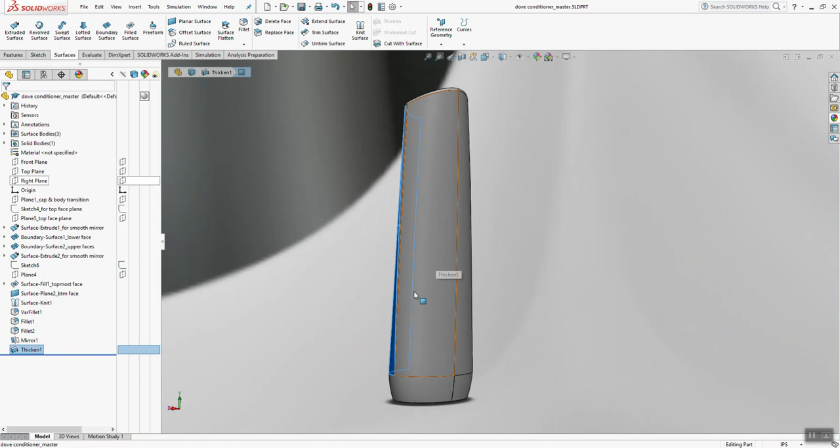That's something that oftentimes would be more conducive to using SolidWorks surface modeling. And that's why we opened up this Surface tab up here. You have to right click if you want to get it open. Right click on those tabs and hit Surfaces. By default, it's usually not on. So like I said, right click on these tabs and open up the Surface tab.

Because that's what we're going to be doing a fair amount of today is surfacing. Obviously, this is one of the reasons why you're in this class, SOLIDWORKS 3. So as you can see also, and this should be very obvious, this is a symmetrical design, which means the left and the right side are equal. And that also makes it a good candidate for modeling one half of the model and then mirroring it over. What that does, obviously, is eliminate a lot of work. Technically, you're doing a fraction of the work that you'd be doing if you're trying to model both sides at once. I hope that makes sense to you.

Now, without further ado, I want to refer over here to the Feature Manager tree. As you know, SOLIDWORKS is capable of showing the history in which the model was built. So even though I already have built the model, I can roll this rollback bar all the way to the top and show you step by step the procedures I used to create this model.

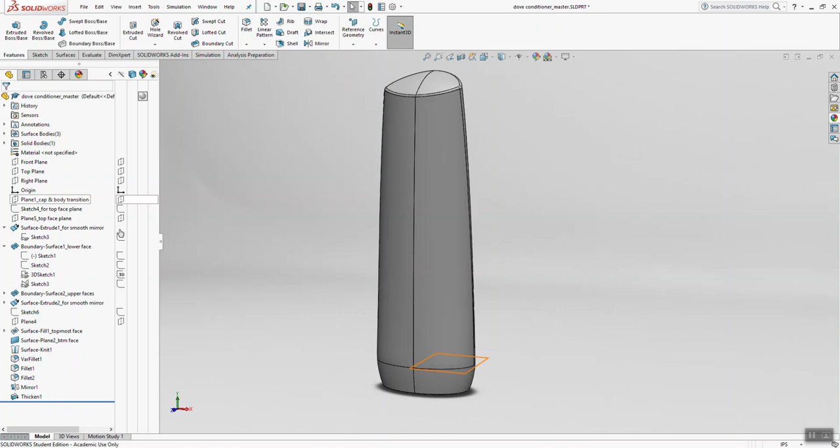But there's a way around that, and maybe you're already aware of it, I'll show you that soon enough. Another thing I should mention is this little arrow up here. I tend to keep it open, for obvious reasons - I can quickly turn on and off these elements, either sketches, planes, etc. Features I can very quickly hide or show.

Another thing you got to be aware of are the surface body folders and solid body folders. I'll be referring back to them quite often, as you'll see.

I need to get a drink of water. I'll be back with you probably in one second your time, about ten seconds my time. That was good water. Yep, I just had a sip.

So, yeah, I'm in danger of blabbing now because frankly I'm very tired, people. So I hope you feel bad for me because I'm doing this late at night after work when you guys are probably playing video games. It's a shame. It's a real shame.

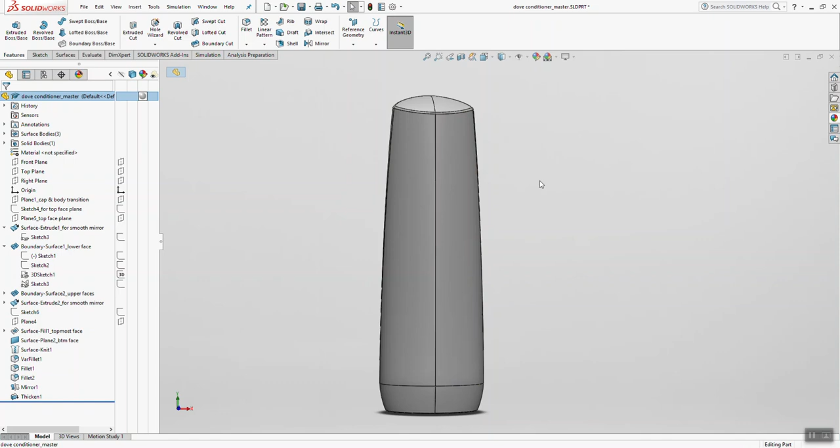Anyway, what I'd like to do is start to tell you how I constructed this. As you know, I pretty much built this whole bottle as one form inside of one part. This part I named Dove Conditioner Master. I put Master there because later on I'm going to be splitting apart the cap area and this body area into their own separate parts. But because these forms pretty much merge together, the cap and the body, and it looks like one continuous form, might as well make it in one file and then split it apart later.

So at risk of sounding redundant, I just told you that.

So let's roll back here, and you'll notice there's a few different ways to roll back. I can actually grab this rollback bar and scroll it up, or I can just right click a particular sketch or feature and then hit the rollback button there. So this pretty much tells me where I started, but if I scroll down to sketch 4, technically sketch 4 is not where I started.

Just to let you know how the rollback bar works, you'll notice when I rolled back up here, most everything down in this region remained grayed out, but a few of these sketches are more dark, like black, and they're not faded out at all. This is a little odd for people that don't really know what's going on, and of course you don't have to do this because you're looking at a blank model.

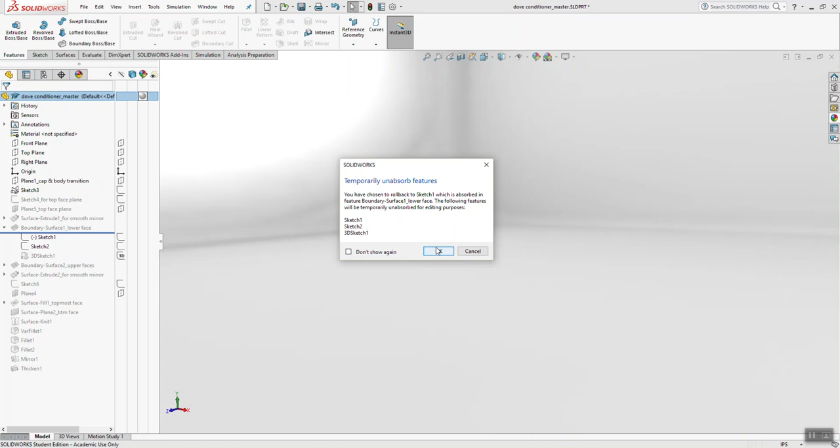But anyway, if I roll this rollback bar down right above sketch 3, it will temporarily unabsorb the sketch 3 feature and pop it back into where it was originally created. And then same thing with sketch 1, sketch 2. If I roll these guys down, it will temporarily unabsorb those features. Oops, hit OK. And now if I roll back down, it looks like all these are now ready to access.

A couple things you got to be aware of if you're working with a rollback bar later on in your career: if you roll back down underneath one of these features that these sketches created, those sketches will pop back underneath those features. Watch this - see, they pop back in now. So now I gotta kind of redo all of that, pop those back out. The reason I'm doing this is, I would imagine you can guess: it's by popping and unabsorbing these features out from the child features that they created.

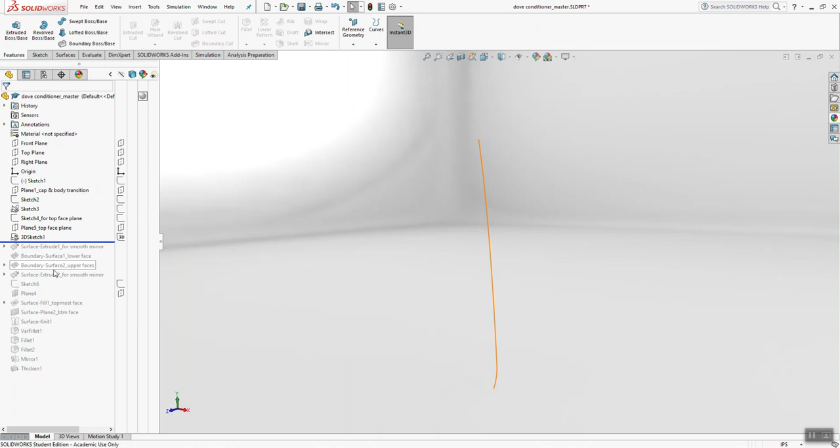I'm now able to see these sketches and planes in more or less their original order of creation. The first thing I did was create sketch 1, which represents the very bottom of the bottle, the base on which it rests.

Then you'll notice I created a plane above that, and a second sketch representing the part of the bottle which flares out. It's smaller at the base, but it comes up and flares out into a bigger elliptical shape in that area. I'll cover these in more detail shortly.

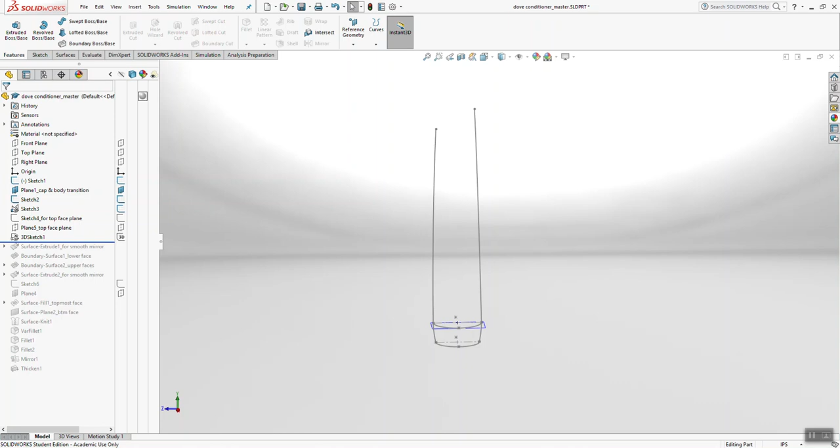I then made, on the right plane, a profile sketch of the shape of the right side of the bottle. Unfortunately you can't see that shape very well in this image, so you'll just have to trust me and create a similar shape. These splines represent the shape of the bottle if you were to slice it in half down the center plane. We'll get to that more later.

Then there's this line I created up here, which was essentially only to create a plane, and that plane was used to create...

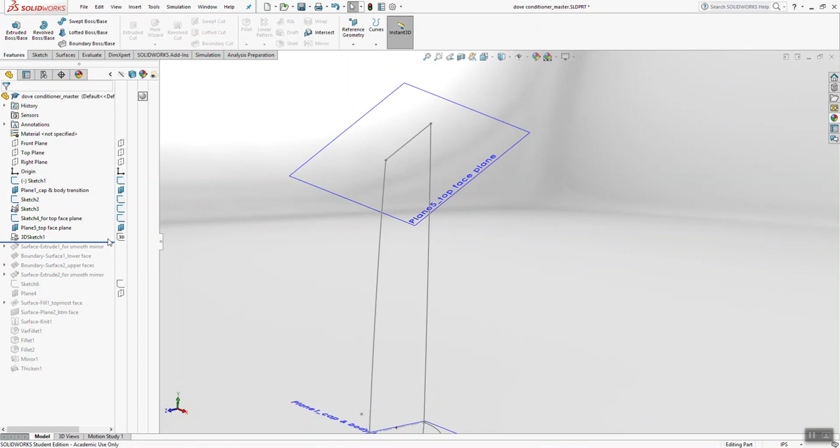Looks like I'm missing one sketch. Hold on. Why is that not showing? Sketch 4, sketch 10 — yes, a couple of those were not unabsorbed like they should have been. I don't know why SOLIDWORKS didn't unabsorb all of them, so bear with me. Ah, okay, now sketch 10 is unabsorbed.

That's good. So I did sketch 10 on that plane, and that represents this little contour up here, which, believe it or not, is a 2D sketch — we'll get into that later.

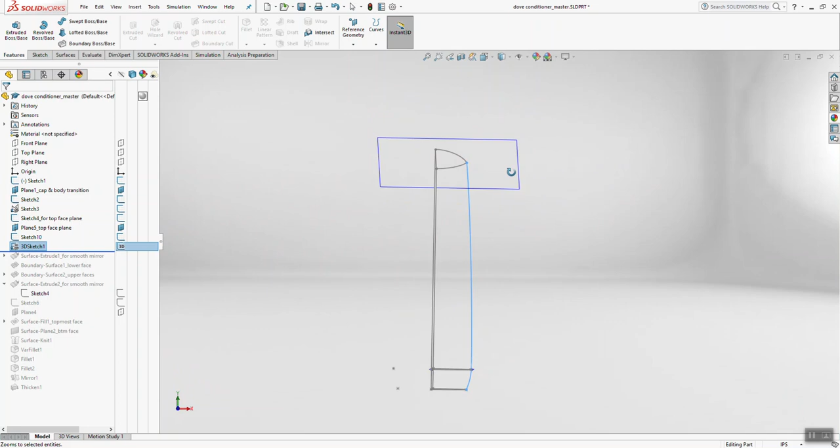And then there's this little 3D sketch here, which represents this part of the bottle that you would almost think is vertical, but in fact it moves forward. This edge moves forward as it moves up vertically, and also, viewed from the front, it moves to the left as it moves up. So it's a 3D sketch because it's got compound curved transitions.

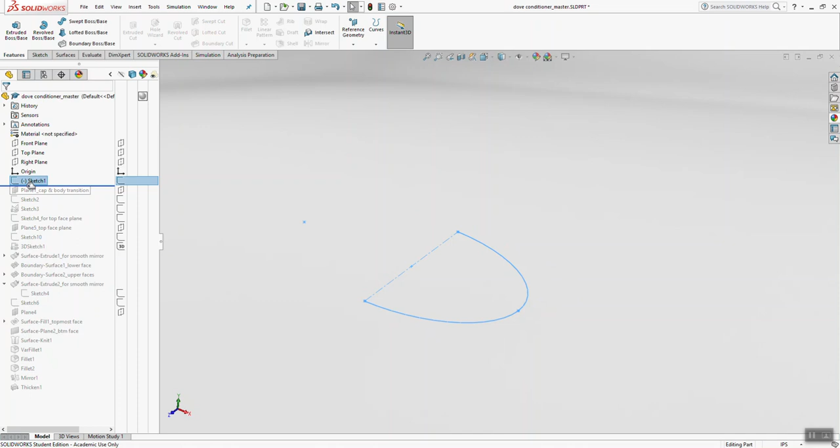So just to let you know, you should start with sketch 1. If you take a look at the sketch plane, I used the top plane — I showed that from Edit Sketch Plane, in case you didn't know. That technically allows you to switch the sketch plane of a given sketch if you used the wrong one. When you switch sketch planes, chances are things will go crazy on you if you've got a lot of features after that. But anyway, I digress — sketch 1 is right there.

So if we open up sketch 1, this is what I have. I basically sketched an ellipse which I trimmed off — you're only seeing half of the ellipse left over. I sketched the ellipse up here and gave it a dimension of 2.5 inches wide in the x-axis by 1.625 in the z-axis. Just for a little refresher on ellipses, this is more or less what I did.

And then I put a little center line in there. The reason I split the ellipse in half is because, frankly, I didn't need to model the whole thing — I was just doing one half of the model that I mirror later. I used Trim to Closest from Trim Entities to cut that off. You're able to dimension the entirety of the ellipse, even though it's half gone, because it remembers it was an ellipse even after you trimmed it.

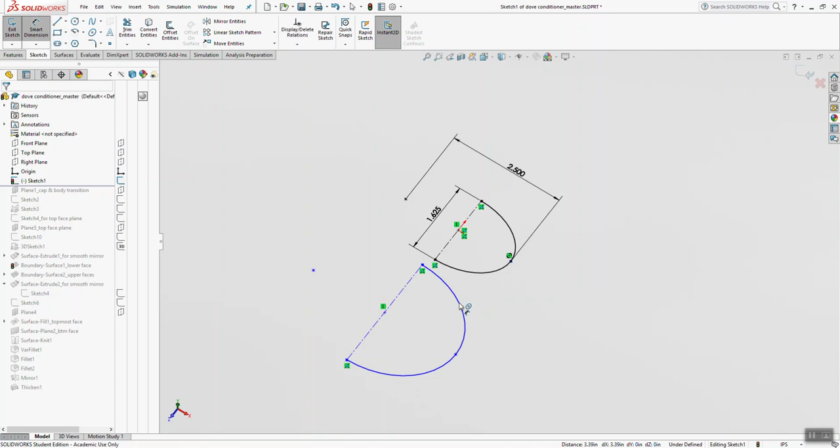As always in these tutorials, for future reference, I'd recommend you look carefully at the relations I put in. I centered this reference line, or construction line, or center line, on the origin with a midpoint relation. It's vertical, and it's coincident — the center of that line is coincident with the origin, so it's symmetric in front of and behind the origin. That little red set of arrows represents the origin of the plane, related to the origin of the model, the 0,0,0 XYZ. So that was drawn on the top plane.

Good stuff. I next, like I said, added in a new plane. I went to Reference Geometry, Plane. If we edit the feature, you'll see I just clicked on the top plane and offset it at 0.75 inches.

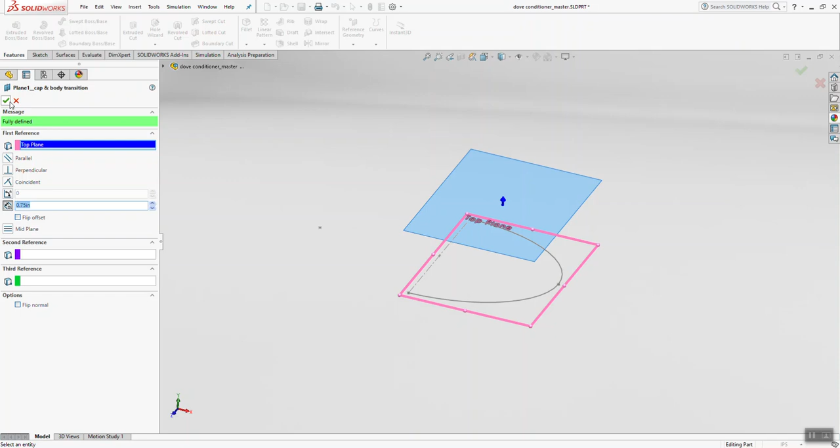This looked to be about 0.75 inches from here to here. I'm setting the plane at that height because that's where the curvature changes between the cap and the body—it goes from moving out to moving back in. That's also a natural place to put the plane due to there being a split that's going to happen later between the cap and the body.

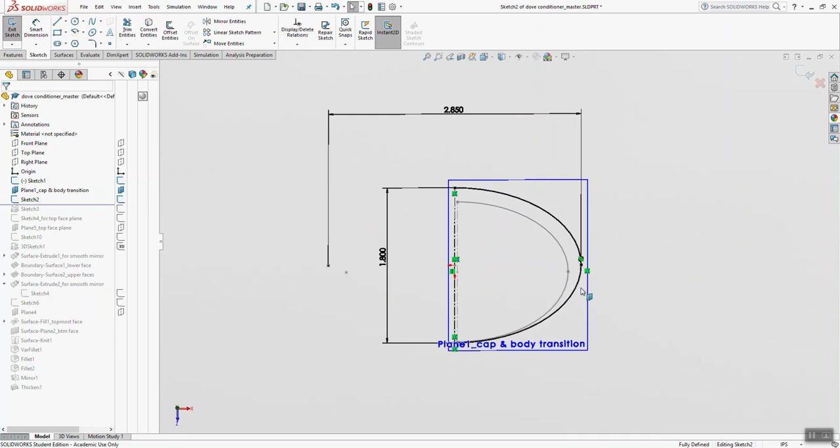That's a plane that ultimately will receive a sketch, which is sketch 2. Sketch 2 is pretty much the same thing as what I did on the original sketch. This gray one back here is sketch 1, but this black one is technically what we're drawing now, and it represents this area here.

Forget about that little curve, that will come later when we do the rest of the master model. Basically, we're drawing the larger ellipse in that area because it moves up and kind of moves out as it moves up. So this ellipse here has to be a bit larger—it's 2.85 inches wide by 1.8 inches in the Z direction.

Same kind of relations going on. I'm going to turn off plane 1—oops, I turned off sketch 1. I'm going to turn off plane 1 because we don't need to see it at this point.

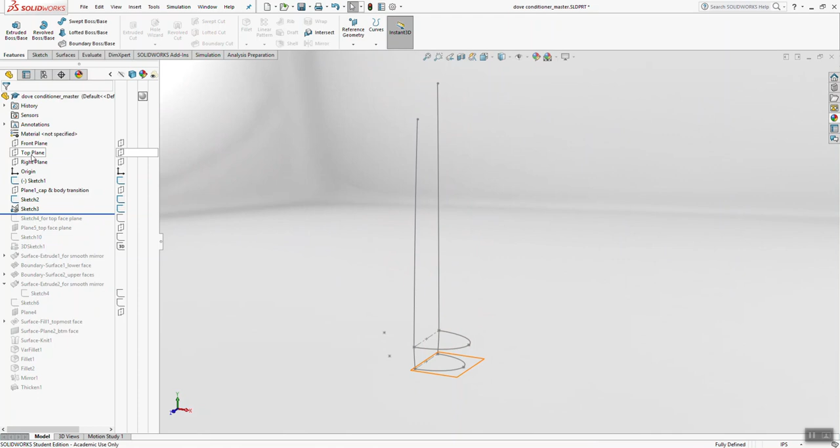The next sketch I did was sketch 3. Sketch 3, like I said before, represents the shape of the front and the back of the bottle at the mid plane. Sketch 3 was actually drawn on the right plane, and that right plane represents basically the very middle of the bottle. If you were to slice through the bottle vertically, right at the mid plane of the bottle, that would be our right plane. And of course, that's a plane we're going to be mirroring across later.

These curves that I'm creating here represent basically the edge that you would get—oops, hold on a second, why did I move to perspective view? Okay, it represents the edges that you would get if you were to slice right down the middle of that bottle, and then looking at it from the right side of the bottle, that's about the curves that you would see.

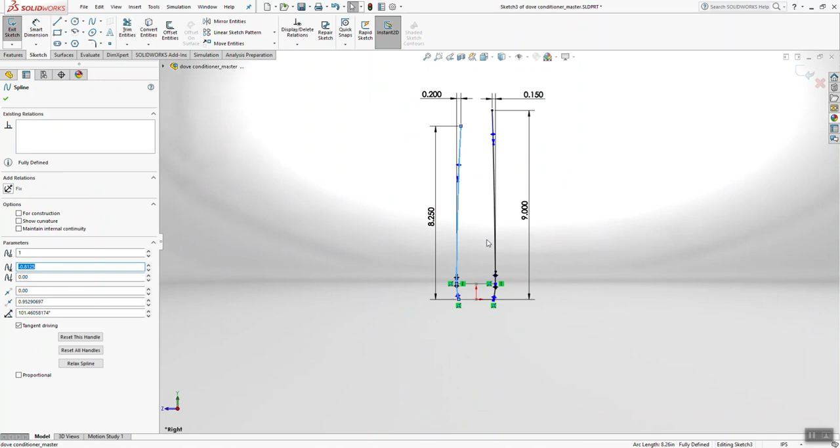So take a good look at what I did here. I used a spline for the front, and that's a 3-point spline. I used also a 3-point spline for the back. And just so you know, that spline—the end point does have to be coincident with the point of this ellipse. Make sure that is actually point to point.

The second point of the spline should be exactly coincident to the point of this ellipse. And the end point of this should be 8 1/4 tall off the bottom and about 0.2 inches in from that outermost point, which is that point there. So 0.2 inches in. Then same thing back here—make sure the point is on the point. Those two are connected, those two are connected.

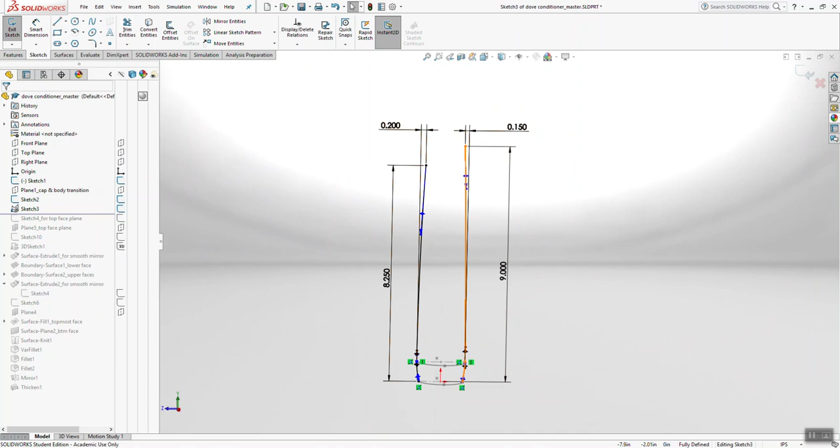And frankly, these dimensions are something you should follow as well—9 inches tall there, 0.15 in. That is setting us up to have this nice little inclined face up here in order to get that kind of inclined face up here that you get in the photo.

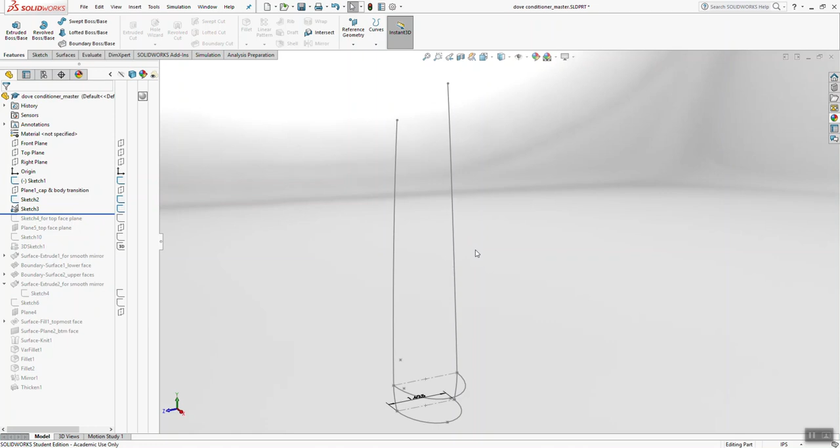This is a good time for me to let you know that there are many different approaches you guys could take to sketching. You technically could sketch these lines first if you wanted, and then sketch these ellipses after and connect the ellipses to the lines. There's many different order of operations that can be taken with SolidWorks or any other CAD for that matter, and still get the job done. So the order in which I'm creating this might not be the order in which everybody else would, or someone else in particular might—just keep that in mind.

But I do feel this is a very stable way to build it, and so I recommend that all of you follow this method. Don't try to build these ellipses first and then build these profile sketches, or the profile sketches first and then the ellipses. Try to follow the same order, just so that your model will behave similarly to mine.

All right, so that is now bringing us to this. And what is this for? Well, this line technically is not going to be creating any geometry. It's more just a reference line, which is why I named it 'top face plane'.

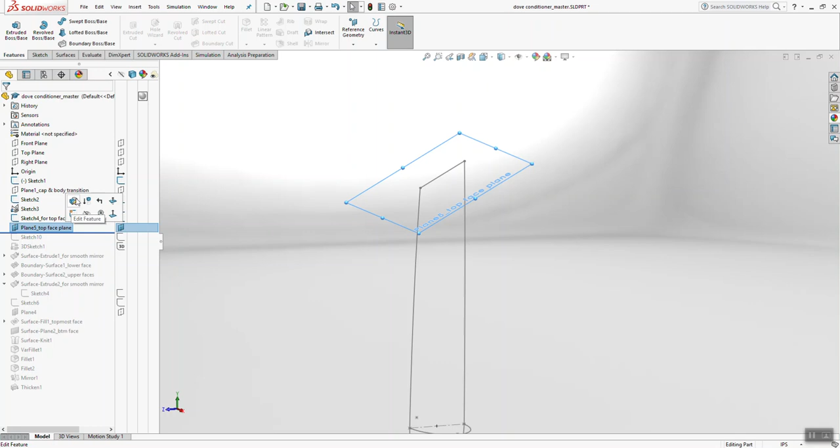It's a reference line because it is going to generate a plane that is slanted, and that's this plane here. So we're making a new plane that's at a diagonal or at an incline. If we edit that feature, you'll see how we created it.

I clicked on the right plane for one reference to create the new plane, and then I clicked on that new line to create that new plane. And what it did by default when selecting those two, it of course made it coincident to the line, which this new plane in blue is.

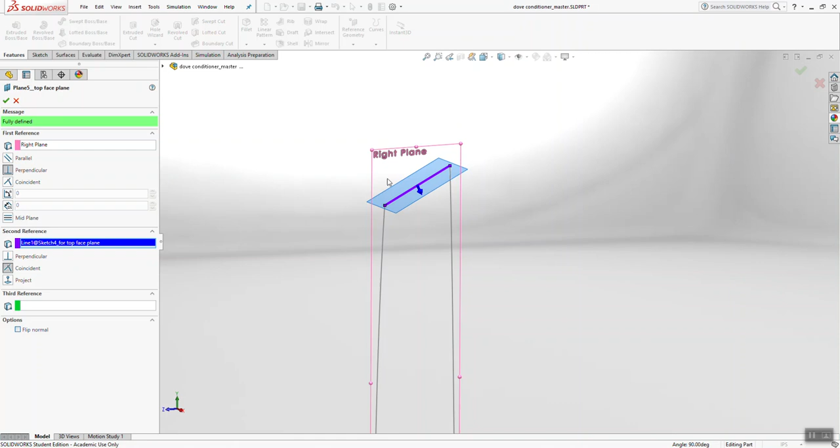It's coincident to that line I sketched, and it is perpendicular to the right plane. Yes, you could try these different options, but really when you have these two selected, what this create plane option or feature is most likely going to do is try to create a perpendicular plane to the right plane on that line. So keep that in mind.

This is one way to create a plane pretty simply. And the reason why I'm creating that plane is ultimately to create the shape that I need for the top of the bottle up here. And that would be this little arc and that back arc. That arc I'm going to draw on plane 5, and that is sketch 10.

Just so you know, I'm going to turn off sketch 4, this one, because frankly it's not doing anything for us anymore. I'm just going to hide it, not turn it off. Hide it so it's out of view. And now we'll see sketch 10.

Now sketch 10 represents, like I said, the edges, the top edges of the bottle. And this is how I dimension them. If I open up the sketch or edit it, you'll see it is 2 different splines. One spline here, a second spline here, and the endpoints of each spline are coincident here.

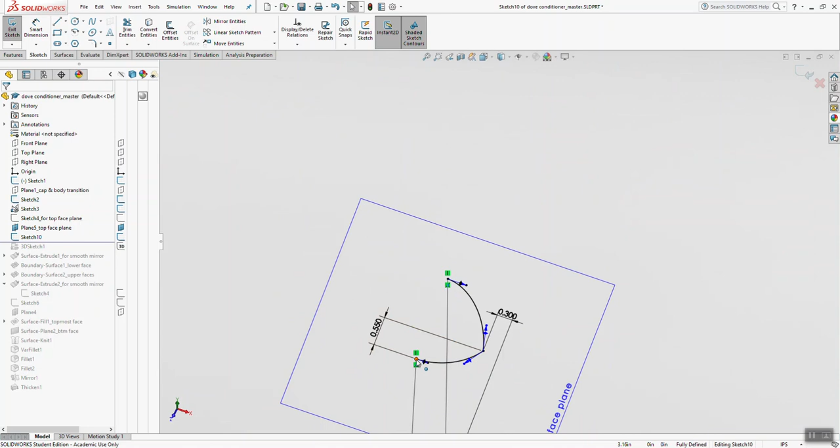I made that endpoint 0.55 from this point as measured in this direction. And then I made it 0.3 from, I believe it was this point over here, but let's go normal to take a look at the normal of that plane. Yeah, I selected that point down there. So if you take a look at that 0.3, it is actually 0.3 in from that point down there.

So that represents the top edge of the bottle. Once again, bear in mind these relations. The endpoint of the spline must be on the endpoint of this edge, coincident. The endpoint of this spline must be on the endpoint of this edge, coincident.

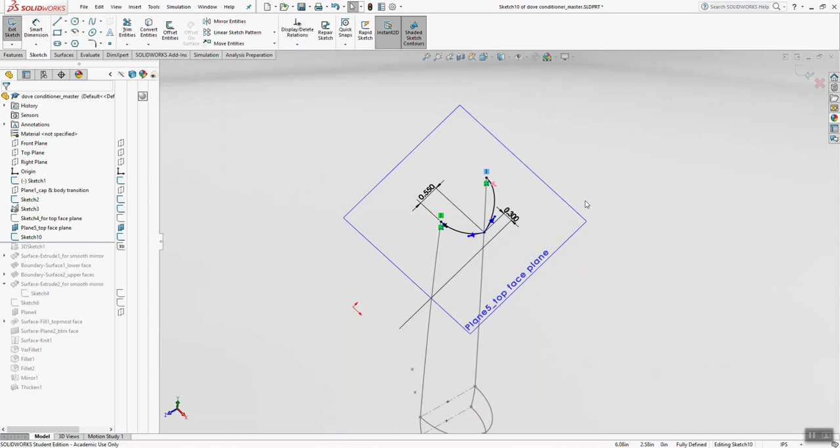And the handle, in this case, because my plane when it was created kind of by default was rotated 90 degrees compared to what I would have expected, I used vertical. You might need to use horizontal depending on how this plane is oriented when you created it. But anyway, the basic idea is this handle is forced to go this direction.

Because if you don't do that, and if we were to delete that relation and delete this relation, you could end up accidentally creating this kind of scenario where your handles are not creating a nice perpendicular entrance to the midplane there. So when you mirror it, you're going to end up with a butt, or you would end up with like a little sharp there. Maybe that's something I'll show a little later, the result in 3 dimensions.

Discard changes and exit. I'm not going to save what I just did there. So that's what you should have by now.

And then we're going to do a 3D sketch. And that 3D sketch, let me hide this plane in the meantime.

Hold on, I've got a mosquito problem. I'll be back. Okay, I don't know where that mosquito went, but anyway.

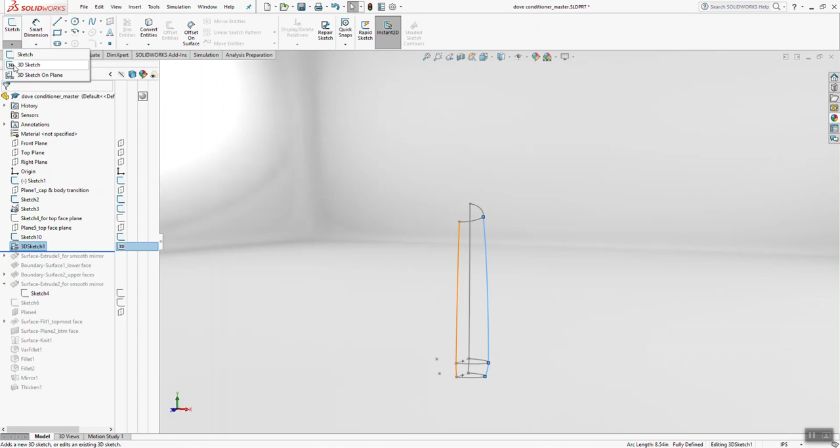Here is a spline that is not a 2D sketch, it is a 3D sketch, and 3D sketches are found with a drop-down arrow underneath the regular sketch button, and 3D sketch is found here. What 3D sketch allows you to do is create a sketch which is not bound to a 2-dimensional plane. This sketch can move any direction in every direction.

In this case, what we've got is a 3-point spline, yet again, and that's because we're connecting 3 sections or 3 profiles. We have this one, of course, and we have this one. So we got 1, 2, and 3 points.

And the thing is, each one of these sketches here has a point that you can snap the spline to. So one obviously point of the spline ends up on the endpoints of these, and another one's yet again coincident. I don't know why the relations are not showing, that's why view sketch relations was turned off. But that's coincident, and this one is coincident.

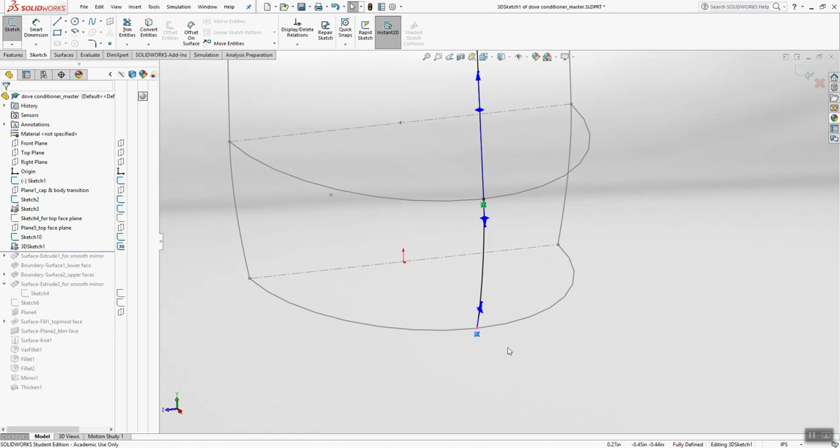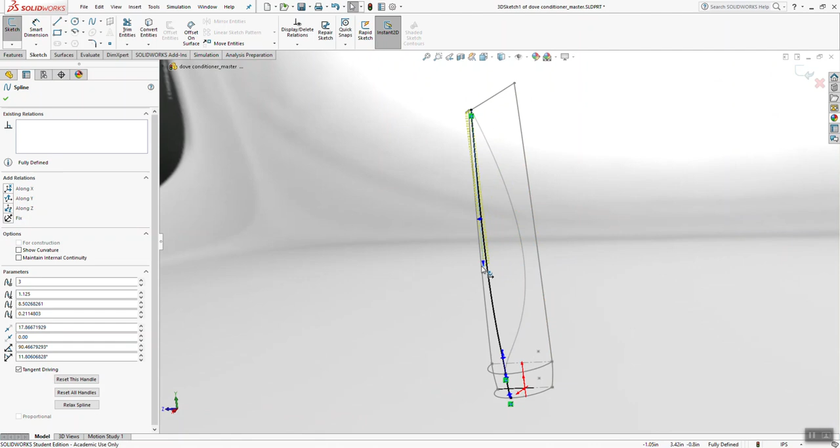That one is also coincident up there. The other thing you've got to keep in mind is that these splines can go wacky very fast. If you try to move the spline in an isometric view like I am right now, you see that yellow box kind of morphing as I move this handle. That's showing the spline handle moving in X, Y, and Z direction.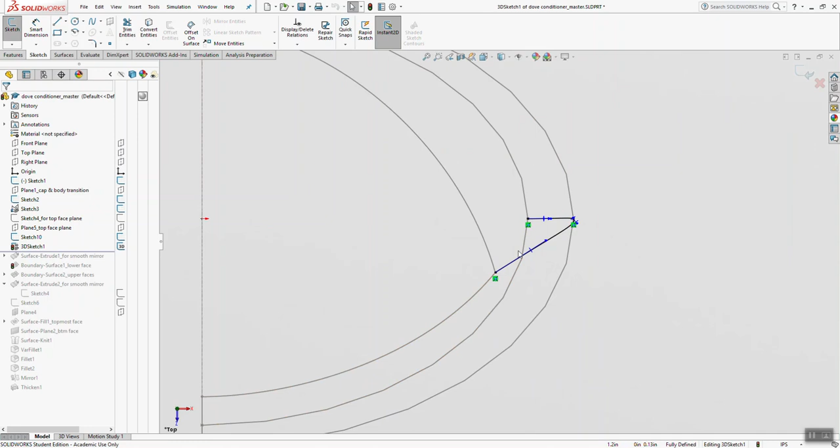But honestly, the same thing can be done in a single view - if you're working in top view, the handles only move X-Z; in the front view, only X-Y, etc. So what I try to do is get the spline looking good in one view, say the front view, then move to the right view and get it looking good, then maybe move back to the front view and tweak it again.

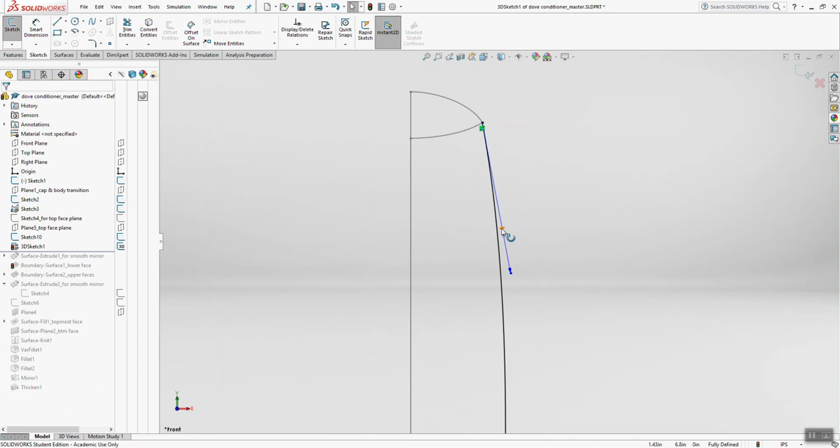With splines, different parts have different functionality. If you hit the very endpoint of the spline, you can move the strength of the spline handle, changing the curvature or acceleration in that area, and also the angle - both at once. If you hit the arrowhead, you're only able to change the acceleration or strength. If you hit the little perpendicular arrows, it only allows you to change the angle at that point. That's how to work with splines in a fairly controlled manner.

Another thing with splines: by default, SOLIDWORKS often has 'maintain internal continuity' checked. Sometimes it's good to have on, other times it gets in the way - it can make splines less editable than you want. So I tend more often than not to turn off or uncheck maintain internal continuity. Play around with that and see what you get.

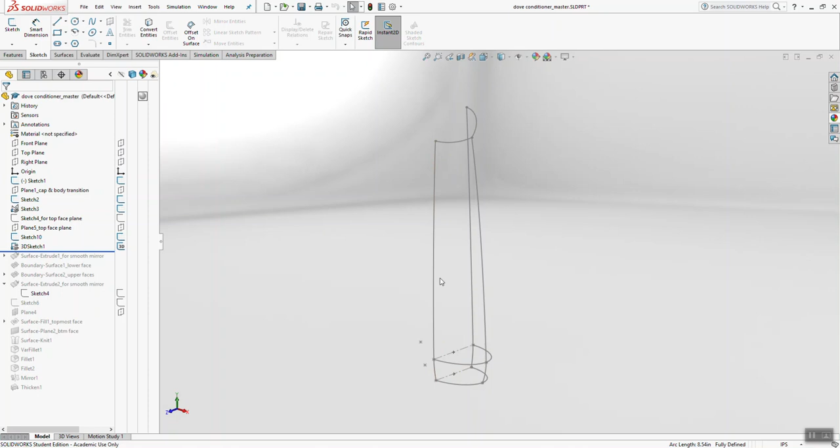So that's basically what we're doing here. It's pretty obvious at this point that we're creating a little wireframe, like a little armature for our bottle. This bottle lends itself to this technique because it's made up of fairly simple faces - all of these are like 4 sides. Basically you've got 1 side, 2 sides, 3 sides, 4 sides, and the same on the back side. When you have well-defined edges like this and you're not having crazy transitions between faces...

It's actually probably a better approach to take this approach where you're modeling by creating all your sketches first, creating a little wireframe like I did here, and then filling in that wireframe with surfaces later.

Yeah, I just got interrupted. I know you didn't realize that, but where was I? I was talking about wireframes.

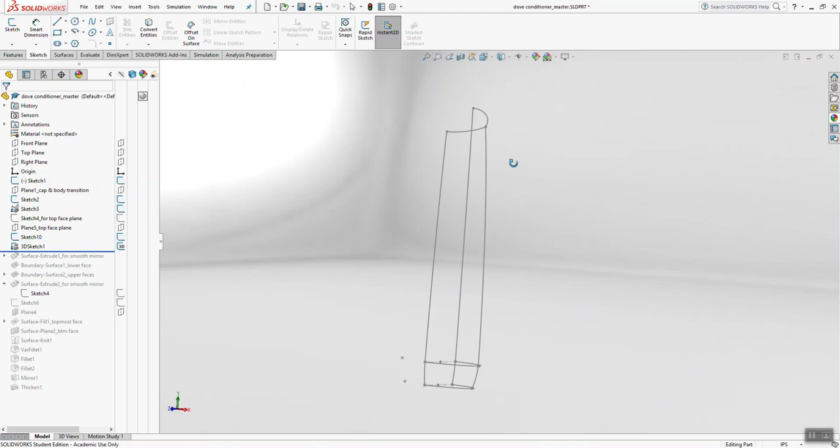Modeling something like this is actually a good idea to use this technique. In later classes, we'll cover different approaches to certain models where you overbuild the geometry and trim it away. But this model lends itself to directly creating the geometry through sketches right at their edges, and that's what we're doing.

The next step would be, and I forgot to show this one. I'm going to unabsorb this sketch. The next step was sketch 4, which is a bit of a straggler, as you can see. What we had before had nothing defining the shape in the midsection on this top face, so we need to do that, and that's what sketch 4 is doing.

Sketch 4 is sketched on, yet again, the right side plane. If you look at the sketch, it's a 2-point spline. You don't really need a 3-point spline, just 1 and 2, then adjust your handles to get the curvature you want for the face.

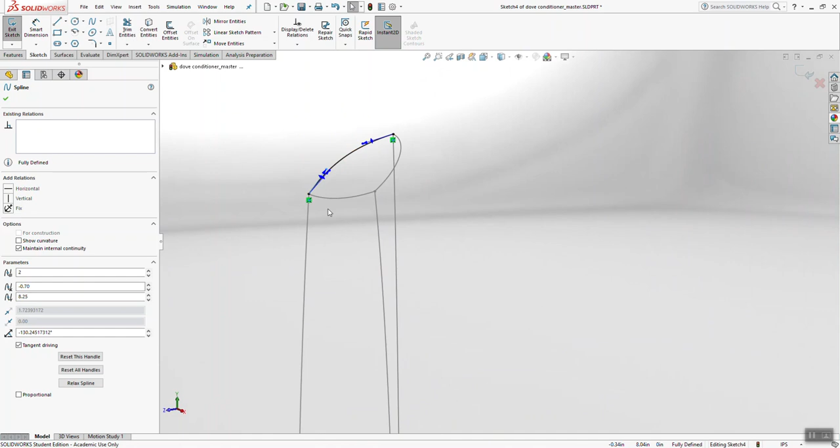Because of that, if I show the sketch, it is exactly how I drew it. It kind of blows out in the middle there.

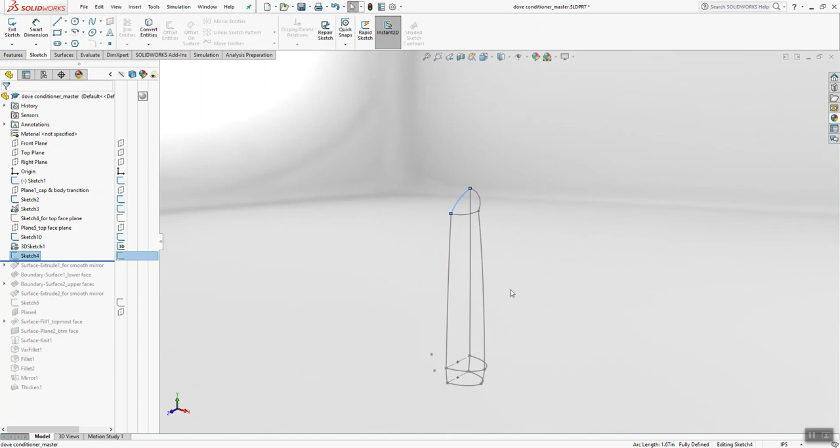Ultimately this will fade into this area, which you'll see soon enough. Let me save. Well, you should save — I don't need to because I've already saved this previously.

Surface extrude is one thing. This might confuse you, but I'll show you anyway. Surface extrude 1 — I basically took those 2 splines in the middle and did an extruded surface with them. Why did I do that? Well, it's kind of an older method, but you'll see exactly why shortly.

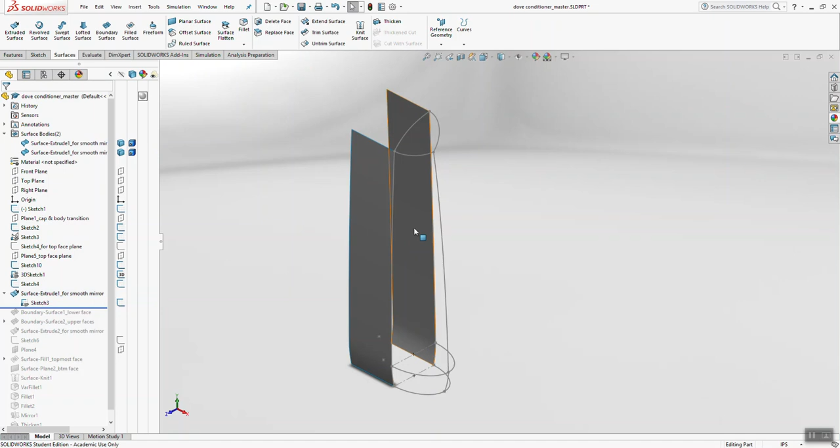Sketch 3, in my case the splines that are in a vertical orientation, those get extruded out straight, because when we create these surfaces on this half of the bottle, we want them, when they meet the middle of the bottle at the right plane, to be very smoothly related to the left side of the bottle that will come later when we mirror it.

When you create these reference surfaces, they're basically there so that when you create the new surface on the right side of the bottle, it will smoothly transition across the midplane, because these surfaces will be used as a reference for curvature as it meets the middle. That honestly won't become clear until a little bit later, so I'll leave them here, but turn them into transparent surfaces for reference. Hopefully those won't be too confusing in the background.

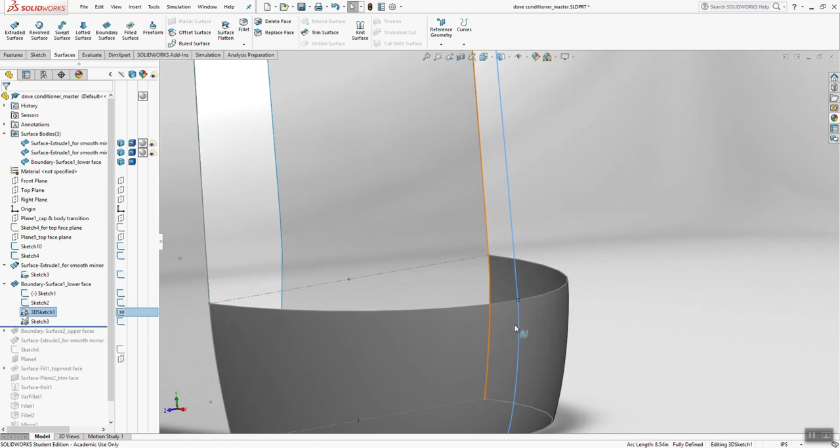The next step would be a boundary surface of this lower face. You might wonder why I didn't go all the way up — it's because of this edge right here. If I went all the way to the top, you'd have this spline edge running all the way through the model. I wanted this bottom face to be very clean without any interruptions if I hid these sketches. This might make sense in a moment.

Let me continue to show you a couple things. If I look at boundary surface 1, this is what's going on. For direction 1, let me expand that again — for direction 1 I use sketch 1, which is that bottom profile, and then I use sketch 2 to build it up.

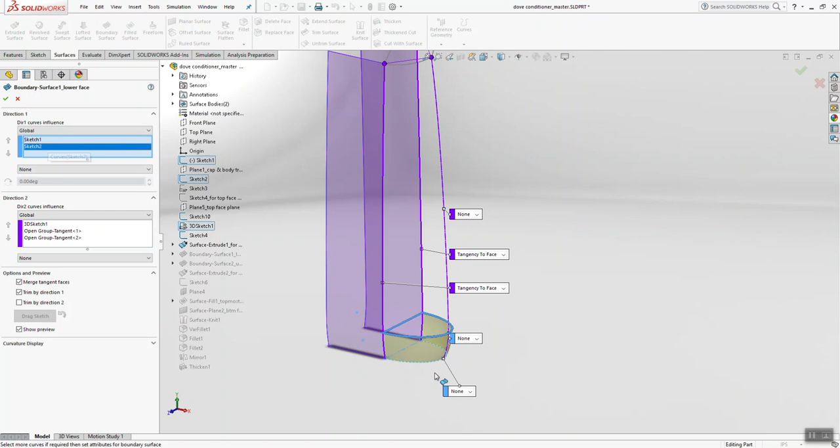The geometry will interpolate between this direction 1 sketch and the second direction 1 sketch. But by default it won't look like it currently does unless you have your direction 2 curves established and defined. These direction 2 curves are basically telling SOLIDWORKS how to interpolate between this bottom profile sketch and this top profile sketch.

Without these sketches, if I was to just clear them, this is what the surface would look like. It's close, but it's certainly not what we want. That straight transition is not what we want.

So for direction 2, we say we want that sketch, we want this sketch, and we want this edge as well. Notice I turned off the sketches that were here in the midplane, and I'm selecting the actual edges instead. For here and for here, I'm selecting the edges of the surface. Whenever you have an edge that is directly in line with a sketch, it's typically preferable to select the edge instead of the sketch in SOLIDWORKS.

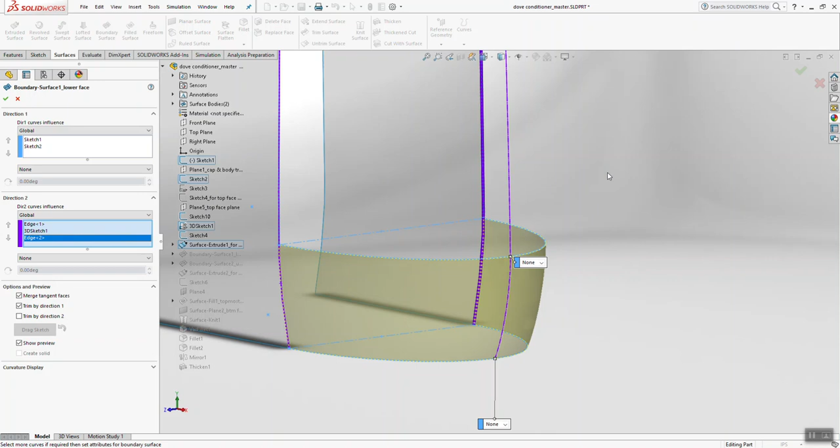I'll tell you why that is right now. As you may remember from previous classes, it's pretty important when creating a surface to consider how that surface meets up with adjacent surfaces. In this case, we have reference surfaces created front and back, which help us define this surface and its curvature in this middle portion. So what you ought to have is edge 1 selected, this front edge here, and you click this little drop down arrow and say tangency or curvature to face.

Tangency means the new surface we're creating, at this edge that is highlighted, edge 1, will be tangent to that edge, or tangent to the surface related to that edge, which means it will come in nice and smooth. Edge 2 is the same thing - you can say tangency to face, because you want this new surface, as it wraps around and meets the middle, to have nice tangent curvature with this surface.

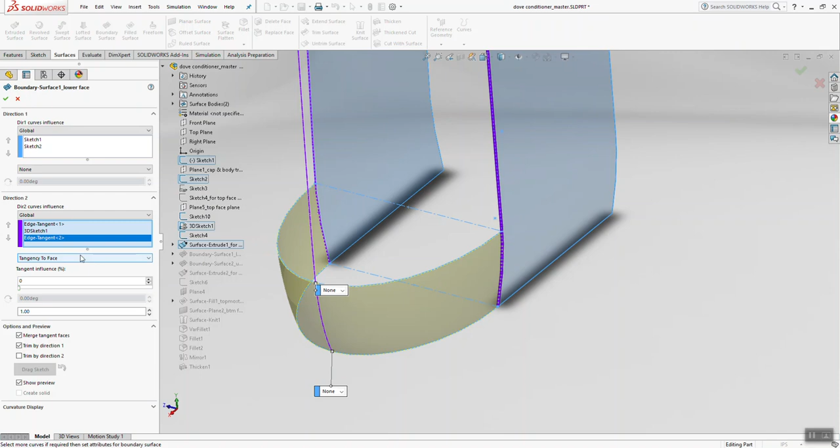The other thing you might recognize is if you don't have trim by direction 1 on, the surface will want to be created all the way along the length of the direction 2 curves. That's because with boundary surface, it just keeps following whatever sketches you're using until it reaches the end of those sketches. But as I said before, we don't really want to go up that high, and I'll show you why right now.

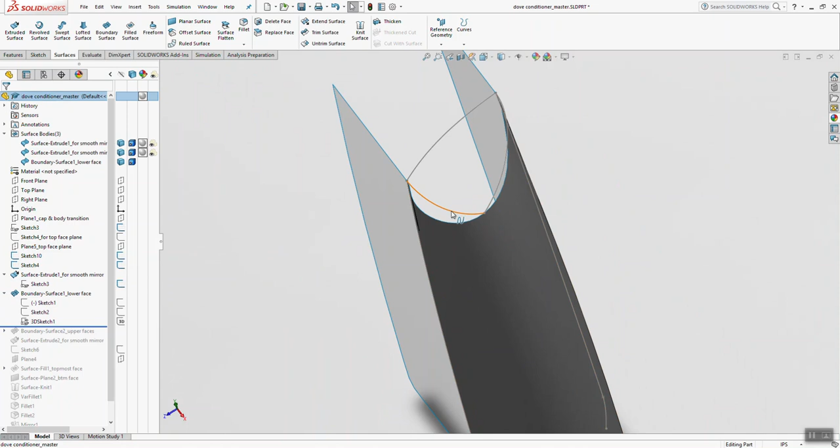Because if I don't have trim by direction 1 on, we end up getting... oops, that's not the best example, but we end up getting this surface, and we're losing out on that bit, the edge there. So if we were to do it all in one shot, where we included sketch 3 in here, it would cause problems. I'll maybe talk to you guys a little bit separately in class about that.

So what I do is make sure trim by direction 1 is turned on. What that does is trim the surface wherever the direction 1 sketches end. So you only have these 2 sketches, it trims off the surface at the ends of those sketches and doesn't allow it to continue running along the direction 2 curves. So make sure that is the case.

By doing all the... oops, I did not save. Hold on one moment, please. Trim by direction 1, and let me hit the check mark. All right, so that's what you should have right there.

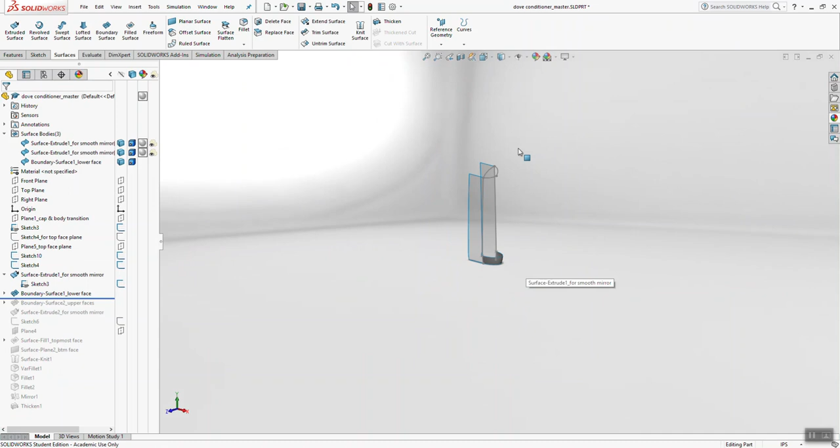Now for the next step, I would say you have to do boundary surface 2. That is the top portion of the bottle, the upper faces. And this time you are involving the edges here that you created on the surface. Like I said before, try not to select the sketch that is here - hide the sketch, and instead select the edges.

This says open group. The reason why it says open group is because there's one edge and another edge that make up this complete curve, and you have to select them together using the selection manager, which is found here, selection manager. If you're going to select both this front edge and this back edge in one shot, use the selection manager. If you're unfamiliar with selection manager, let me know and I will explain it. Hopefully that's something you guys already know.

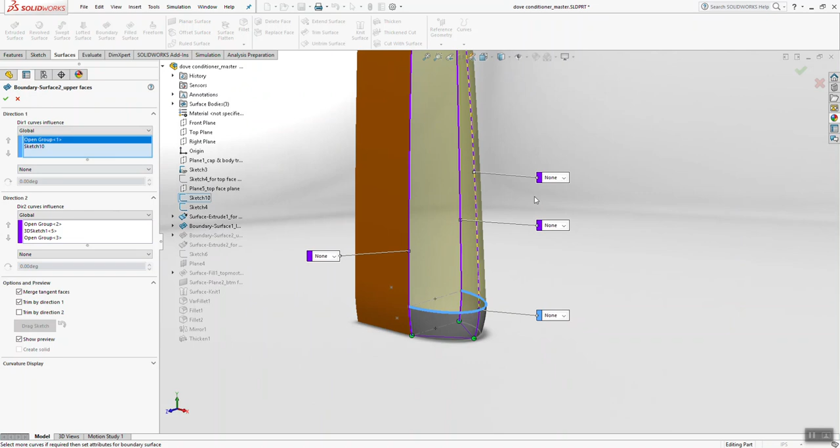But at any rate, what we're trying to do at this point is use this bottom curve to generate the bottom edge of the surface, and then we're trying to click and get this top set, or this top sketch, as your second direction 1 curve.

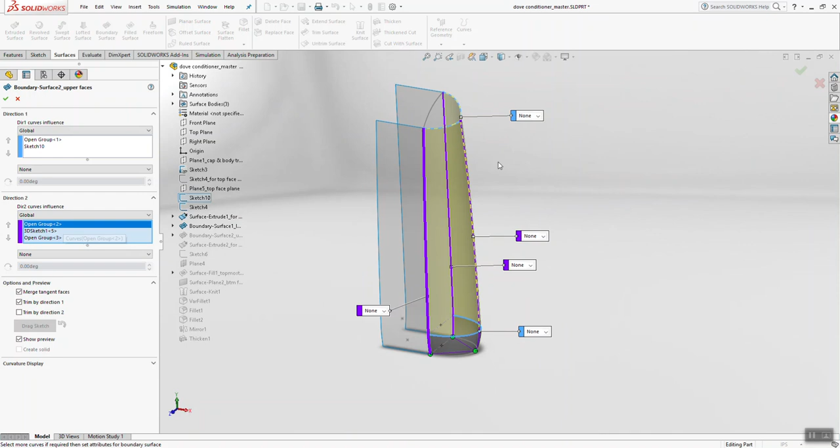So obviously the form interpolates between those two. And then to direct SOLIDWORKS on how to transition the form properly, we have to rely on the other direction, 2 sketches. If you guys are familiar with lofted surface, direction 1 is kind of like your profile sketches, direction 2 is kind of like your guide curves.

It's very analogous to that, but boundary surface is better, so just keep using that. I'll explain why if you're curious in class. At any rate, I used this sketch here in the front, used the 3D sketch representing the edge over here, and also selected the rear edge back here. This time there's really a need to make sure trim by direction 1 is selected, because if you don't, see how it continues down along these direction 2 curves until the bottom, and then you have multiple surfaces.

So yet again, trim by direction 1, and it will stop right there where it needs to stop. All right, so when all is said and done there, you have a surface here.

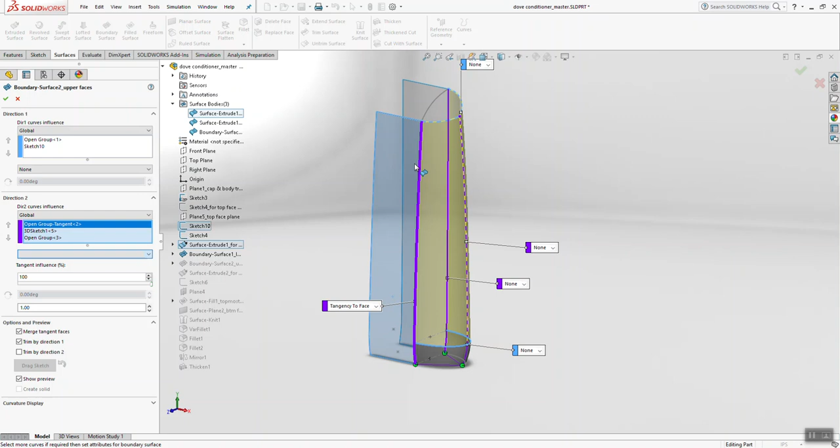There's one thing I neglected to mention though, briefly. You really ought to have here, for this edge at this point, yet again, tangency to face. What that does is make this new surface tangent to this reference surface next to it. Same thing for the back edge, tangency to face.

One other thing I neglected to mention earlier was typically when I'm doing boundary surfaces, I will turn on, underneath curvature display here, I will turn on mesh preview. That way I can see how the surface is being generated, I can see the interpolation happening. You can actually change the mesh density so that you can see more of the interpolated kind of curves that are happening.

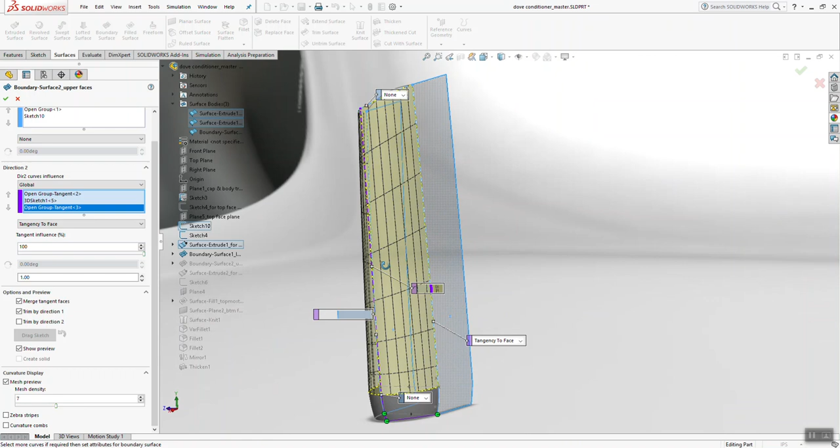This can tell you a lot regarding how healthy or how proper a surface is being built. So I would recommend you always turn on mesh preview so you can kind of see that for yourself.

You can also possibly sometimes see a difference between when you say tangency to face and when you don't. Right now I turned off, I set the curvature setting to none for this edge. So if you watch these mesh curves, now I go tangency to face, they modified slightly. Now these curves are moving in at more of a perpendicular kind of direction to that midplane. That's very hard to describe without showing you some more examples and without you experimenting a little yourself.

So, yeah, I'm tired. So hopefully we'll wrap this up soon so I can go to bed. And you guys can finish. That would be a beautiful thing.

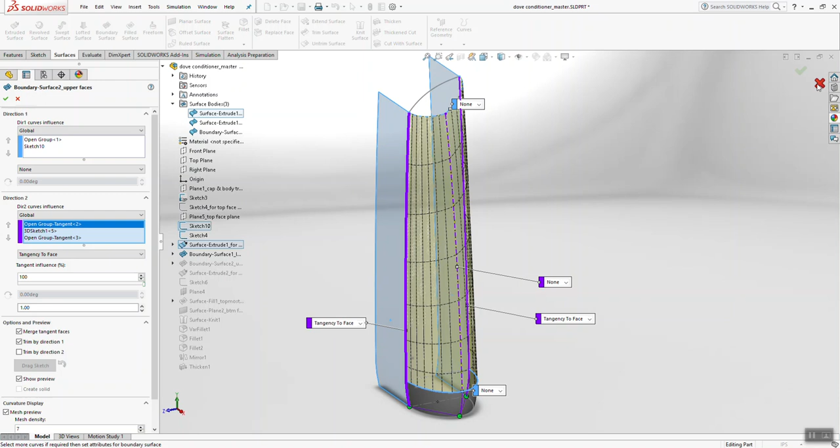So let me see here. That is that, we've got that all set. Oh crap, I think I forgot to. I was supposed to hit the check mark. My apologies.

That'll just give me an excuse to show you different ways of doing this. See these little drop down boxes? This is another way to access those same options, tangency to face. It's basically applying them in a different area. Now it applied them over here because they're all connected, just different parts of the interface.

Okay, so we do want to maintain that. Now I would recommend I would turn off these reference surfaces because they're just kind of getting in my way now. Same thing here. Let's see here. Surface extrude for smooth mirror.

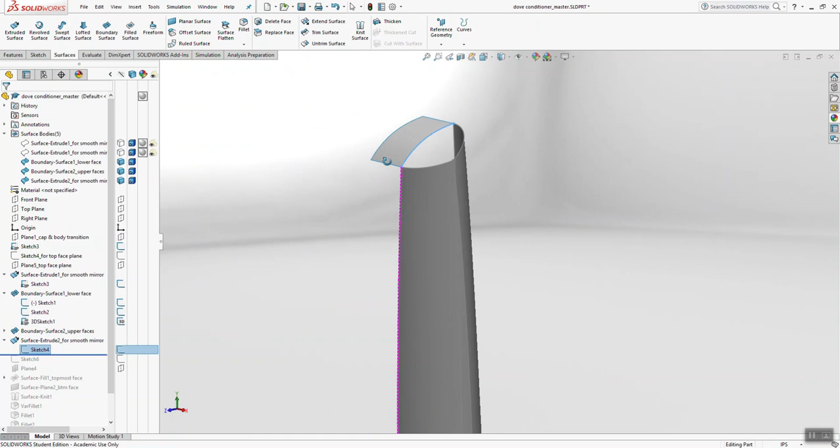So I took now sketch 4 and did a surface extrude straight out. The reason for that is yet again the same reason I made these over here, it's so that I can generate a surface on this top that is going to be smoothly mirrored across.

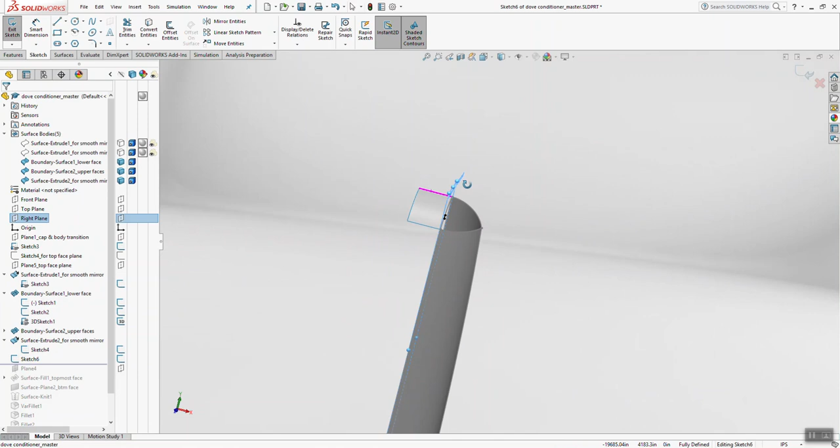The next step is for me to create sketch 6. You might be a little confused by this at first, but what's going on here is sketch 6 is sketched on the right plane. So yes, it is sketched on the right plane here. See that? Technically, all I did was draw a line, which is coincident to that point. If I highlight, see that point over here? And it's coincident to this edge.

I would also just hide all these sketches from before because they're just kind of getting in the way of selecting edges. If you still have these sketches turned on, what can end up happening is you click a sketch instead of an edge. And like I said, when you have an edge and a sketch on each other, it's best to select the edge.

So where did that go? Oh, I wanted to turn that one off too. All right, so we got that simple line.

The last thing we have is a perpendicular relation, which is basically saying this line is perpendicular to that curve, found over here under perpendicular. The reason we're creating that little line right now is it's just a reference line in order to create this next plane. And that plane is this plane. The reason we're creating that plane, you'll see in a moment exactly why.

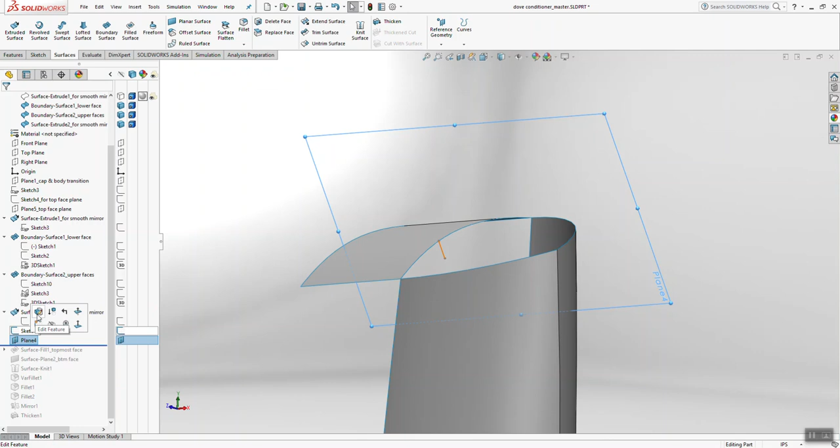To create that plane, you actually have to click on the right plane, and then click on that sketch. Like before, you saw earlier in the model, there's a new plane being created perpendicular to the right plane, located at that line. That's the new plane we want to be able to sketch on.

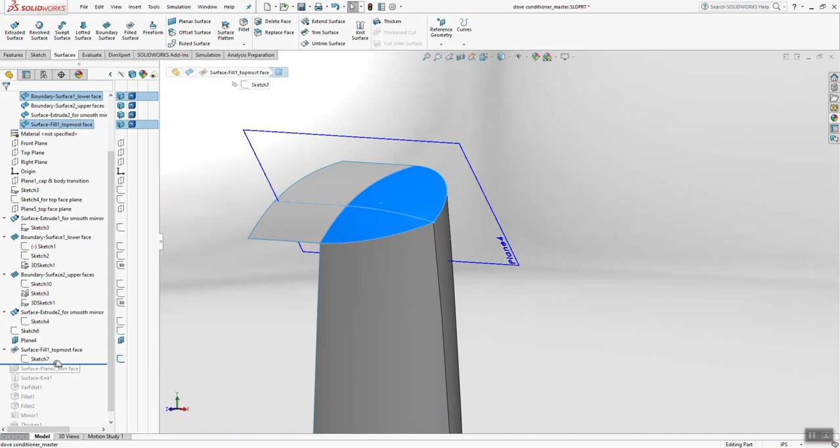Let me hide sketch 6 because it did its job in creating that plane. Let me rotate to a less awkward position. The next thing we're going to do is fill in the top face with a surface fill. This leads me to let you know why we created that plane here, it's plane 4.

I'm going to absorb sketch 7 here because sketch 7 was actually done next. So before you do the surface fill, build in sketch 7. And sketch 7 is sketched on that new plane.

The reason I created that new plane is to create a nice clean line which goes from this corner and runs in a very clean direction to meet up with this edge. It kind of runs essentially perpendicular to this edge.

This edge is running this way, and this edge is running essentially 90 degrees. If you measure between this edge and that line right here, it's 90 degrees. That's why we created a plane like that, using that sketch back there, to create that clean connection between this point and that edge.

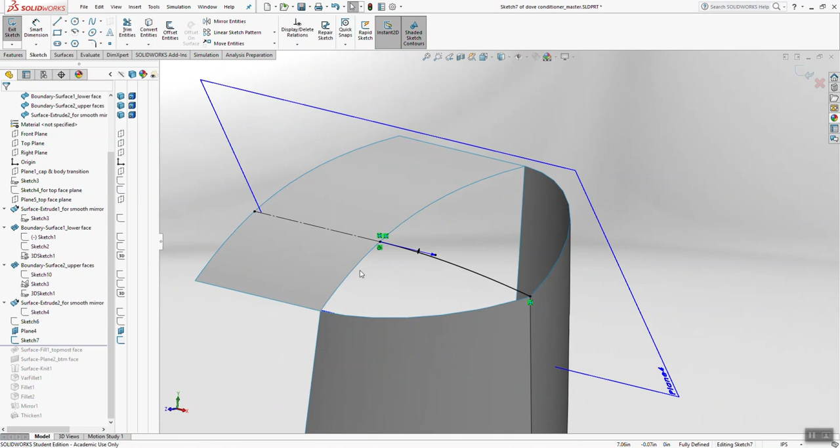Now, this line is here for reference. It's not really necessary, but it's there. I could show you how I made it. Technically, I don't really need to, but I will.

Just so you know, underneath convert entities, if you hit this drop down arrow, there's this intersection curve. What this does is allows you to create a curve at the intersection of either two faces, two surfaces, a face and a plane, or two planes, or on and on it goes. Basically, wherever you have two faces or two face-like elements, wherever those intersect, a line will be drawn.

So right now, we are in a 2D sketch on plane 4 in my case. So if I click on this face, or this surface here, face, surface, same idea, it will draw a line on this surface where it intersects with the sketch plane that we're on.

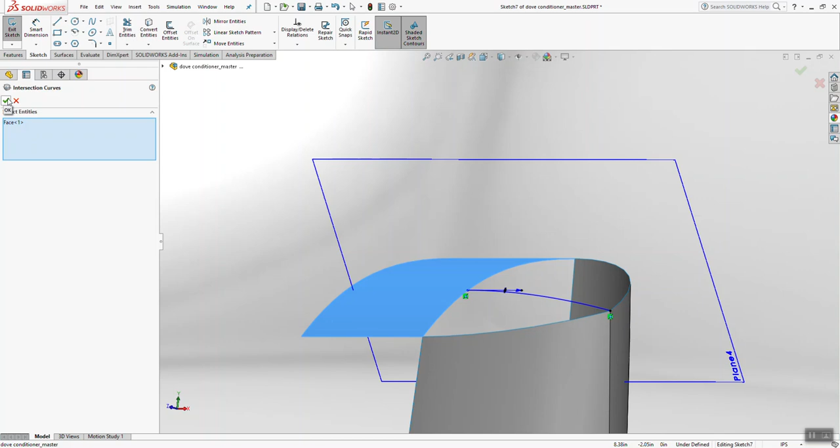And if I hit the check mark because I have this surface selected, it drew a line where the surface and the plane intersect. You'll see uses for this later in your life, believe me. You'll see this crop up again for sure. This is just a very rudimentary use of it at this point in time, but it is something you should be aware exists.

The reason I created it in this case is so that when I created this two-point spline here, the spline handle can be made basically tangent to this line. So the spline can be made tangent, or the spline handle and the line can be made tangent.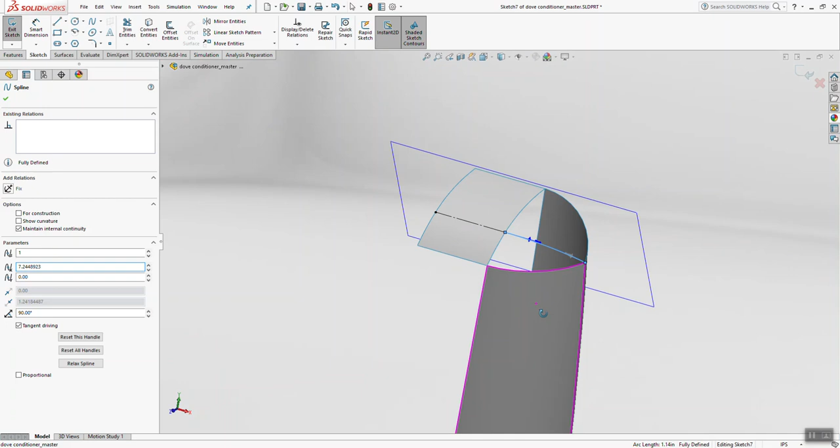That's something you guys should remember when working with splines and you want to make a spline tangent to something else. You can make the actual spline itself tangent, or the spline handle, which is connected to whatever it is you want to make it tangent to, tangent. It's a little confusing, yes, but the reality is you want this spline to be tangent to that line.

So put that in. Make sure that you have the endpoint on this edge. Make sure that's really coincident. Absolutely make sure this point and this point are coincident, or else you'll get failure.

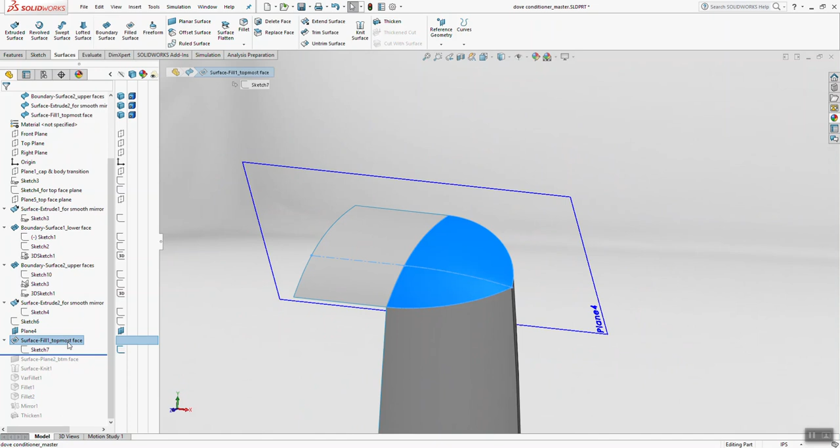The reason we're doing a surface fill now on this top face is because if you try anything else, it's going to be giving you problems. Specifically, surface fill gives you this really nice clean surface that is very standard and healthy.

If you see this mesh preview that I put on here, all these little UV curves, called direction 1 and direction 2 curves, are very cleanly, perpendicularly related to each other. And that's what you want to see with a surface.

Surface fill does that with irregular shaped contours or gaps in surface geometry. So if you have a three-sided shape, like 1, 2, and 3, which this is, surface fill is oftentimes a good candidate. Surface fill allows you to select all those edges which make up your patch boundary, and it fills that in.

But if it weren't for sketch 7 that we created on this plane as a constraint curve, we would be getting a surface that looks like that, and it looks like it's kind of collapsing over here. That's why I created this line to begin with on plane 4, to use as a constraint curve to constrain the patch surface that's being created here, constrain it to the edge so it follows it.

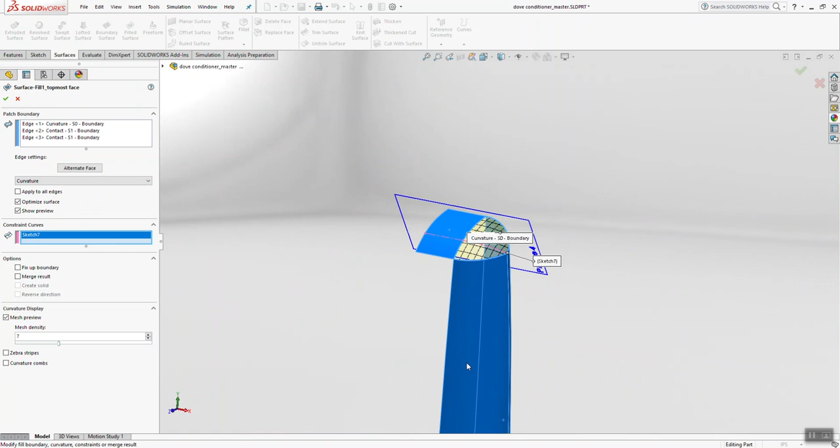Now that creates a very nice looking surface, but one other thing you have to remember is, because this is going to get mirrored later, like we did for the boundary surfaces below, we have to be very conscious of this middle transition. You see how we have these 3 edges that are selected? Well, this one in the middle is very important. These 2 edges should be just contact, this one and this one. The surface that you're creating will just come up and contact those edges and do nothing more.

But this edge in the middle, you want to do more than just contact. You actually want it to have a curvature relationship with this reference surface that you created. You could also do tangent, and that's okay, but in this case I would just use curvature. It's a little bit cleaner result in my case.

If you have none, or just contact, in this case, look at what happens. If you get rid of your constraint curve and delete it, with just regular contact selected, the surface that you create just comes up to the middle and isn't really smoothly related across the middle, which would of course give you a very weird line when you mirror later.

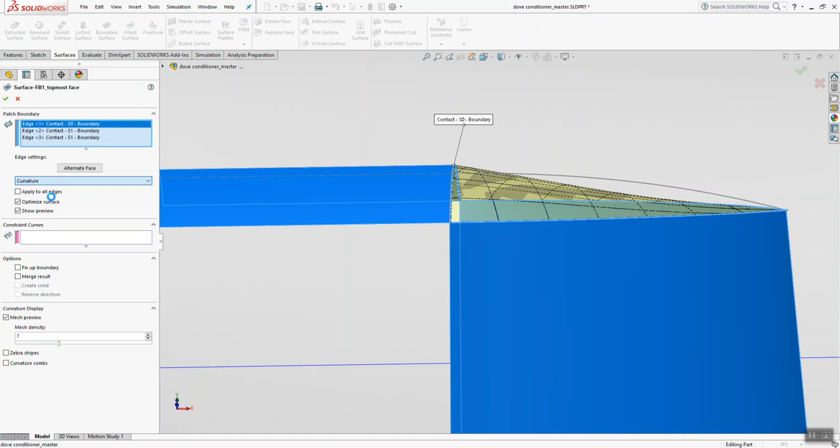So at least with this edge, you need to go to tangent or curvature, and that allows it to smoothly dive in. And then of course add the constraint curve, and that constraint curve forces it to continue arcing out all the way to that point.

Let me know if you have any questions about this. This is something that is important, these little pieces of the pie. Let me see if I actually maintained all those. Yes, I did. Okay, so we're all set there.

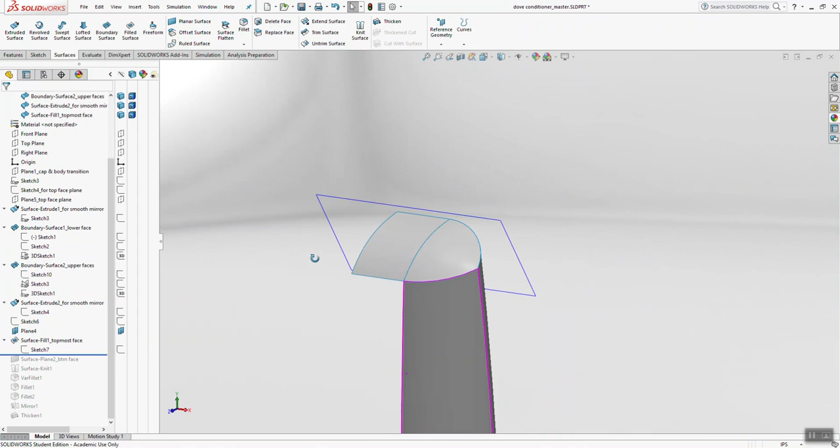Now, I don't really need to see plane 4 anymore, so I'm going to hide that. I don't really need to see this middle surface for reference either. I'll hide that. It's still up here, they're just hidden.

So now we're getting pretty close to having half the bottle modeled, at least the master part. The bottom face is something we got to do next because frankly, we got this opening. We kind of want to seal that off. That's very easily done with a surface plane.

A surface plane is just a very simple tool to use. It only works when all the edges or sketches that you select are basically lying on the same plane. If there are any edges that are not on the same plane as the other edges that you select, it will not work. You'd have to use a filled surface for that.

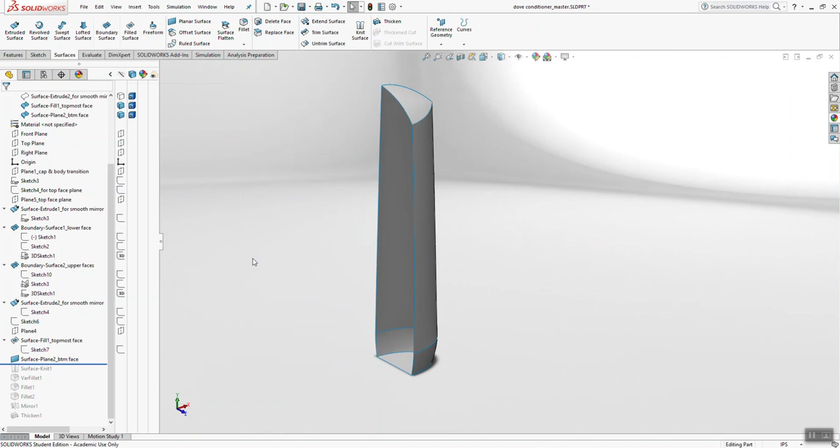But with planar surface, you'll notice all I did was select edge 1 and edge 2, and it filled it in with a simple flat surface. Easy, no worries, a very lightweight feature. I would encourage you to use planar surface as opposed to filled surface in this situation because it's just a lighter weight feature that takes up less file size.

So as you can see, we have a bunch of surface bodies now. We've got some that we don't really need because they were just references and we don't need any longer, but we do have 4 which are useful to create the geometry of the bottle: the topmost face, the bottom face here, the upper faces, and the lower face. 4 separate bodies. Now we need to actually tie those bodies together.

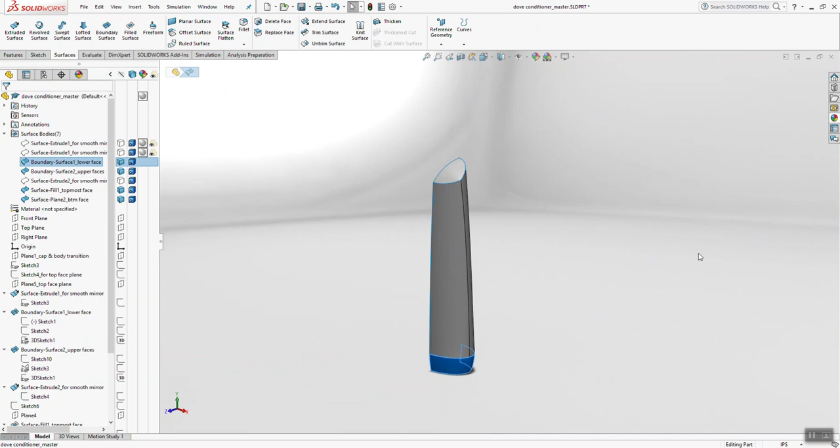In order to basically do the rest of the master model, so to link these surfaces together, these separate bodies, we probably have to use a particular tool, and that tool is Surface Knit. Like the name of the tool, essentially what you're doing is knitting together separate surfaces to fuse them and integrate them with each other so that they become the same body.

So if you go to knit surface up here, like I did, and I'll edit the feature so you can see what I did, you just select all 4 surface bodies, and you could say merge entities, not a bad idea. There's also a create solid option here. You can try that, but guess what?

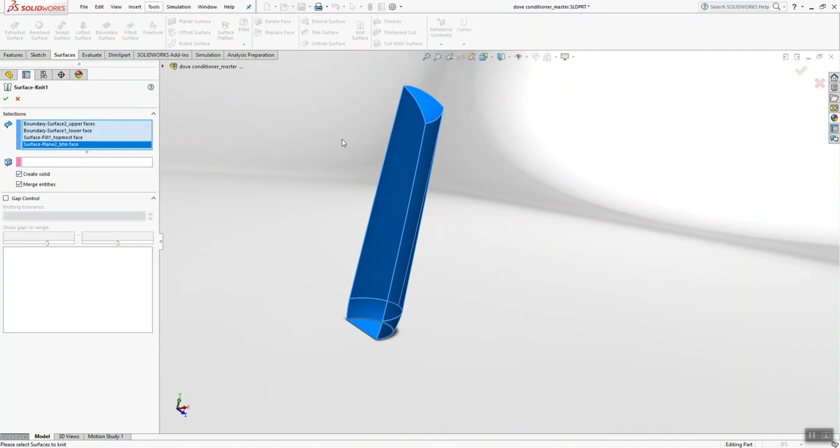It's not going to work. Why won't it create a solid right now? Because you have a gaping hole here. This cavity is open in the middle. So it's not going to create a solid. I'm sorry, as much as you would like it to, it won't.

So you do have now, though, after you do that, you'll notice 1 single body from all of those surfaces, which used to be 4 separate bodies. And what that does for you is a couple good things. It sets us up in a good way for splitting the model apart into their own bodies. It allows us to do a couple of things which you're about to see here next.

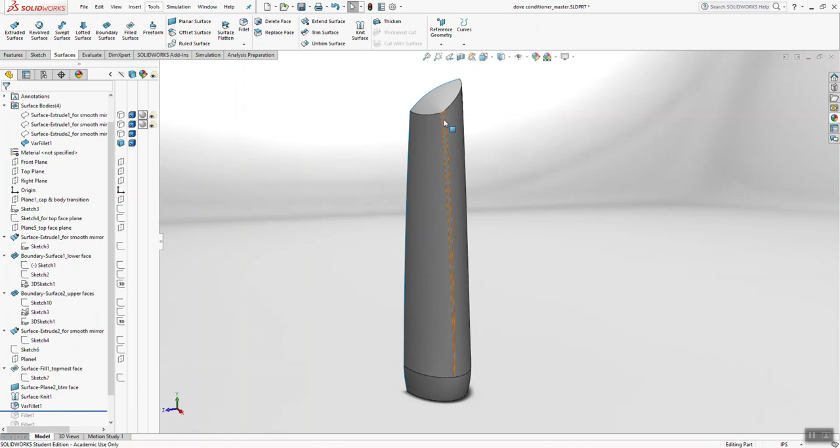Next thing is creating a fillet on that edge. And I did a variable fillet only because I thought there might be a chance I'd want to change the radius of curvature as it transitions from the top to the bottom. Chances are you can just use a normal fillet and it will work fine, but I used 0.125 and it gave me a pretty solid looking fillet there.

And then I continued down and put a fillet on this one, and that fillet was a 0.08 inch fillet just on those edges on top. And then continuing down the tree, I applied a fillet, I believe, at the very bottom, and that fillet is here. And I believe that was a 0.015, 15 thousandths inch fillet.

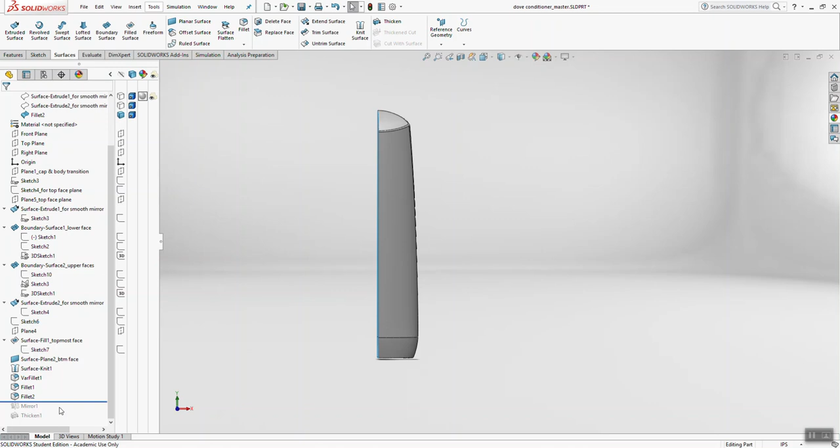Then I basically, at this juncture, said, now's a good time to actually mirror this over, to see what it looks like when both halves are together. And now it's starting to look like a real bottle, fortunately. If we add perspective, now we can get a better sense of, as a designer, what this thing is looking like. Not too shabby, it's working.

But you'll notice there's one more thing. If you do a section view by clicking the button up here, the section view button, you'll notice that this is actually hollow, still surface body. And that, of course, is confirmed by coming up here to this folder and seeing, oh, surface body. It's still there.

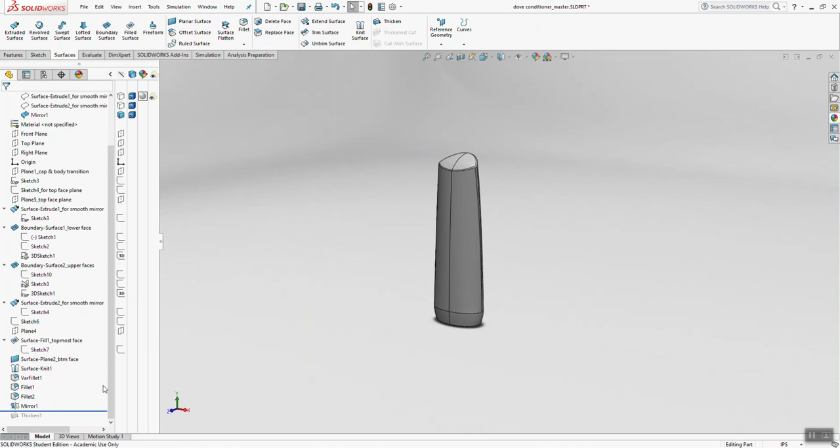And like I said, technically, more often than not, and right now we're creating a master model, so it's not so important, but pretend that this was the final model that you wanted. You'd want this to be a solid. And in order to turn this surface into a solid, it's pretty easy.

You just go up to thicken. And in this case, when I say thicken, I don't want to just do a thicken where it's a wall thickness being added, and it remains hollow with a wall thickness. I want this whole thing to be filled in with mass entirely. And if you have this thing knit properly without any gaps, you should see this right here pop up. This doesn't always appear unless you have an enclosed volume, which we do.

Create solid from enclosed volume. So you check on that. If you don't check on that, otherwise it's going to create just a solid with a thin wall around the face, which is okay in some situations, but not right now. Instead, do create solid from enclosed volume.

And now, if you take a look at your folders, you now have a solid bodies folder with that in there as a solid body. And if you look at your section view, you now have a legitimate solid model. And this is not a bad thing, particularly when we want to do some things in the next video.

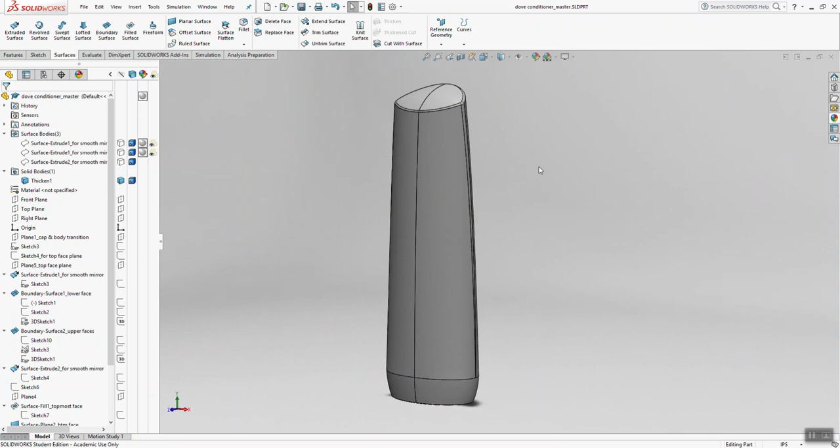And I know everybody's looking forward to it. It's going to be even more thrilling and riveting than this video was here. I'm telling you guys, if you are not like giggling like little girls at this point in time, based on all the fun that you had during the course of this video, I don't know what's wrong with you. You really should just be ecstatic, because this was probably the most exciting YouTube video you've watched in at least a good 2 months. So please be happy you came to class today and were able to enjoy such a riveting piece of history in the making.